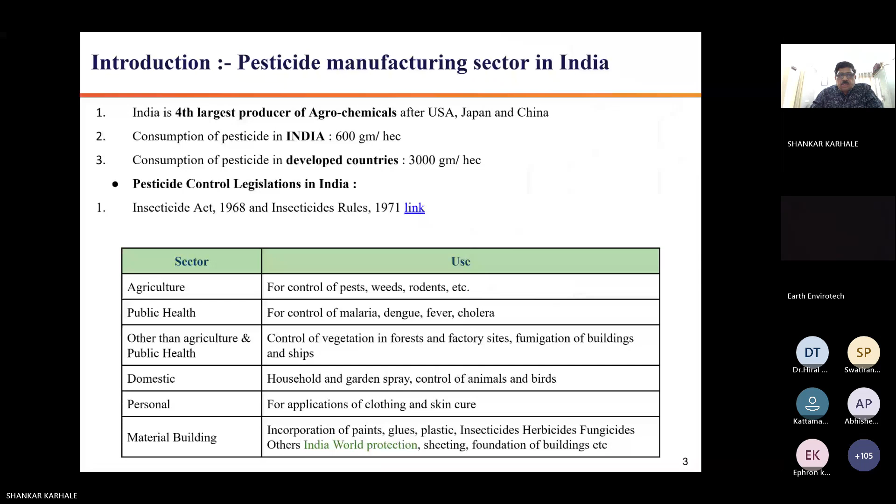So pesticide manufacturing involves chemical reactions like other sectors, like alkylation, bromination, chlorination, acetylation, condensation, cyclization, as in chemical industries like pharma and dyes. Here also, batch, continuous and semi-continuous mode operation; distillation, extraction, crystallization, filtration, evaporation, all unit operations are utilized in the pesticide sector like pharma and other chemical industries.

Reaction 1 is A plus B equals C plus D; reaction 2, D plus E equals F. Reaction 1 is a normal reaction like other sectors have. Only reaction 2 is a slightly toxic reaction here in the pesticide sector. All chemicals utilized in pharma, dyes, rubber and other sectors are also utilized here. Only the last reaction has some toxicity, so you have to take care of the last stage of reactions. Otherwise normal reactions. So here F is the pesticide and the others up to E are raw materials and intermediates.

My voice is clear, na? Anyone? Yes, sir, it is clear and audible.

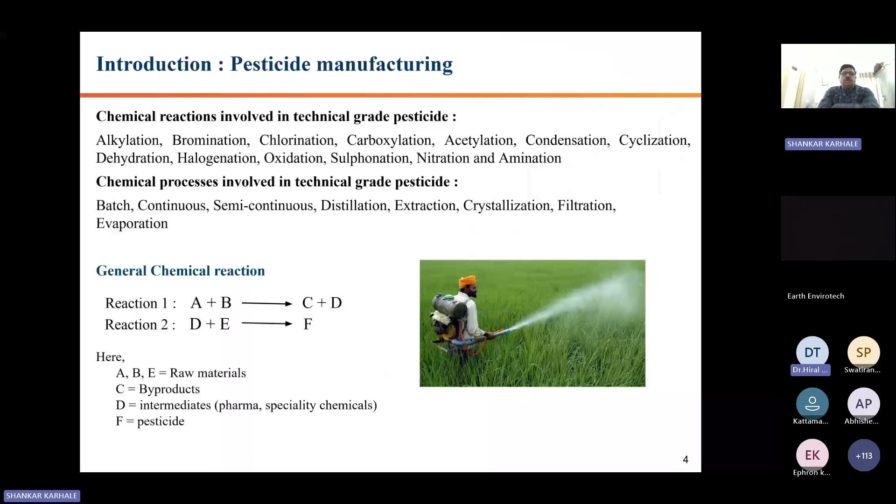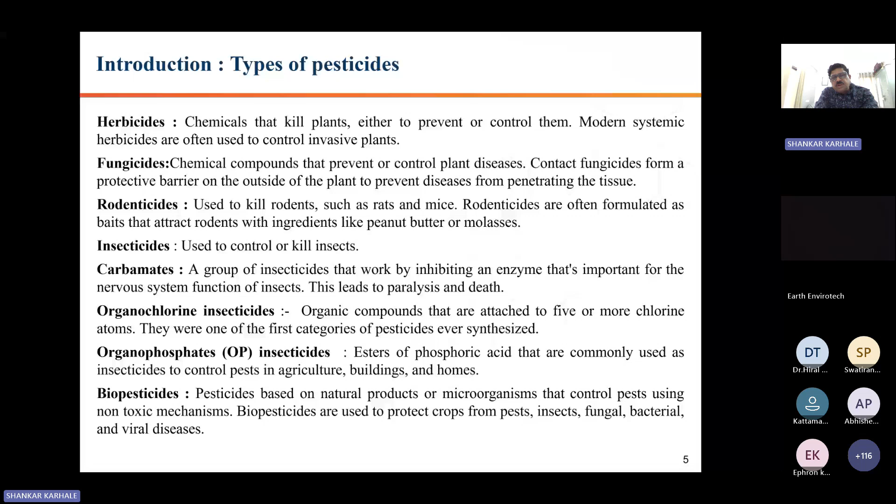Okay. So types of pesticides and utilization are very, very important because you should differentiate. Otherwise there may be hazards if you do not properly distinguish the use and how to utilize the pesticide. Right now, if you see pesticides coming into food and vegetables, the only reason is that utilization of pesticide is not proper, and awareness of pesticides is not proper among farmers and other users.

So it is very, very important to understand what type of pesticide it is and how to utilize it, how much quantum you should utilize. So herbicide is one type of pesticide. A herbicide is a chemical that kills plants, either to prevent or control them.

Modern systemic herbicides are often used to control invasive plants. Whenever you are utilizing herbicide, don't keep it along with fungicide and others, because one is for burning and killing the plant, and the other is for growing the plant. So you have to distinguish between herbicide, insecticide, and pesticide.

Fungicide is a second type of pesticide, also a chemical compound that prevents or controls plant disease. Contact fungicide forms protective barriers on the outside of the plant to prevent diseases from penetrating the tissues.

Third is rodenticide, used to kill rodents such as rats, which we utilize many times in our house and also in storage areas. Then insecticides are used to control and kill insects. This is a different utilization than herbicide and others.

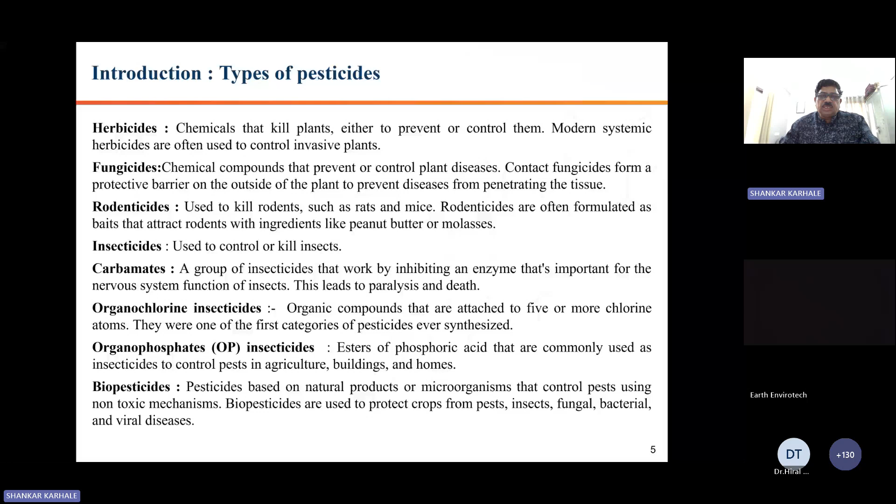Now we will see wastewater and water management in the pesticide sector, same as the chemical sector. Only some parameters are slightly different, meaning discharge parameters. Otherwise this is common for all chemical sectors.

Water consumption in pesticide processes mostly happens in the processes because a lot of cooling and heating is required. That time process utilization is there - cooling towers, boiler, and domestic purposes.

Water source - in Gujarat you have GIDC, if you are from Maharashtra, MIDC, like this there is a corporation many times. If you have a bore well, you have to take CGWA permission. But the major part of chemical industries in GIDC, MIDC, depending on your state, that corporation and industrial estate provides water source also.

But if you are utilizing bore well water, if you are not supplied by your corporation, and you want a bore well, then you need CGWA permission - Central Groundwater Authority.

Wastewater generated from process, industrial cooling, is wastewater that cannot be used back into the processes without treatment. So this is the definition of wastewater - without treatment you cannot utilize it for recycling again or for discharge. That's called wastewater.

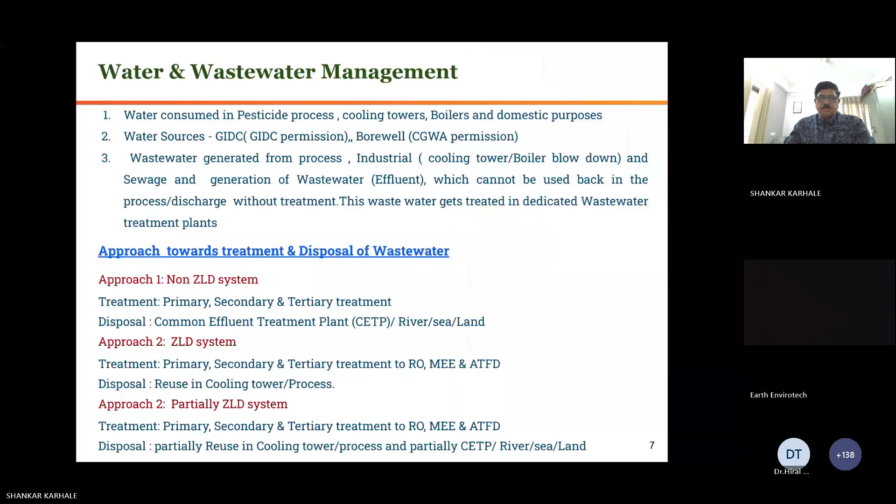Why is wastewater treatment important in the pesticide as well as chemical industry? To avoid environmental pollution and health impact, to meet CETP discharge norms, deep sea discharge norms, and water quality for recycling and utility.

Whenever you want to utilize the treated water, treatment is very important to recycle. Otherwise your equipment, reactors or cooling towers will be damaged if you use this water without treatment. So this is very important.

Whenever you want ZLD implementation, discharge to deep sea, discharge to river, discharge to surface, it's very important in chemical industry as well as pesticide industry - that is the segregation part. Then only you can achieve the desired norms. Otherwise, it's a very difficult area to treat chemical industry and pesticide industry effluent. So we'll see how to segregate this generated effluent in the pesticide sector as well as chemical industry.

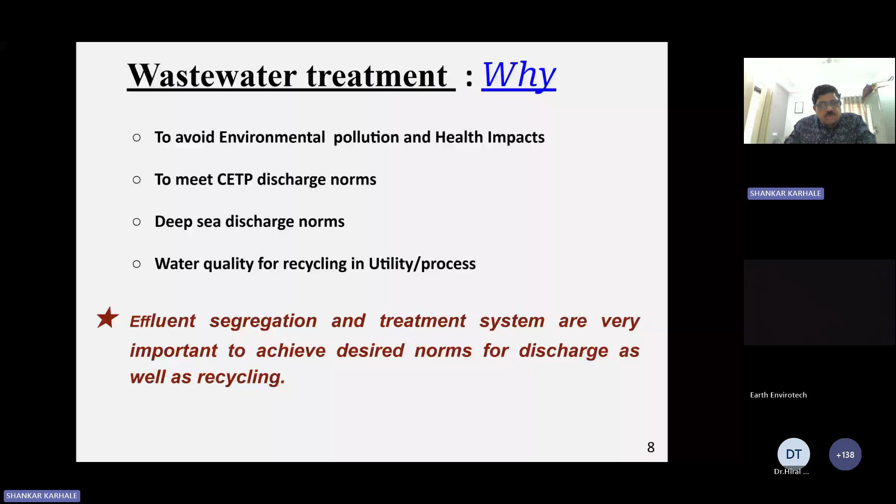So majorly there are four types of wastewater. One is from processes - chemical processes require some washing, generation of water in reaction, distillation, and all these things, to remove water from the particular final product. So there is a lot of generation of process effluent. Then utilities like cooling tower, boiler blowdowns - there is generation from utilities.

Third is washing and cleaning activity of equipment. Then fourth is sewage water. So this is how we segregate the major parts in industry.

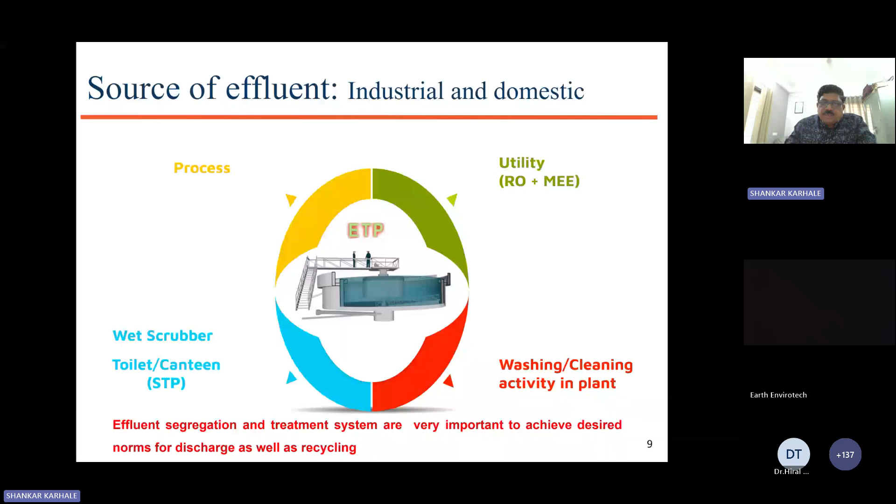And on a micro level, again we'll see how to segregate the effluent in chemical industry. This is by experience - I have divided it into some segregation parts. This may not be written in your book or syllabus anywhere, but this is by experience. We have decided this, and we got results on that - if you segregate like this, then we are getting good results for the pesticide sector as well as chemical industries.

So if you have low COD and low TDS effluent - if COD is 5,000 and TDS is 10,000 - the criteria is like this: if BOD is more than 30% of COD, then you can take it into biological treatment. Biological treatment can be activated sludge process, MBR, MBBR, depending on the technology accepted. So this is primary, secondary, and tertiary treatment. Secondary treatment can be activated sludge process, MBR, MBBR, like this.

If BOD is less than 30% of COD - because in biological treatment, the COD-BOD ratio is very, very important. Generally in chemical industry, 30% BOD is there. But if you go to the food industry or alcohol manufacturing industries, then you'll get about 50% BOD ratio. But generally, as a thumb rule, in chemical industry and pesticide industry you get about 30% only. If less than that, you need pre-treatment like an oxidation system followed by ETP.

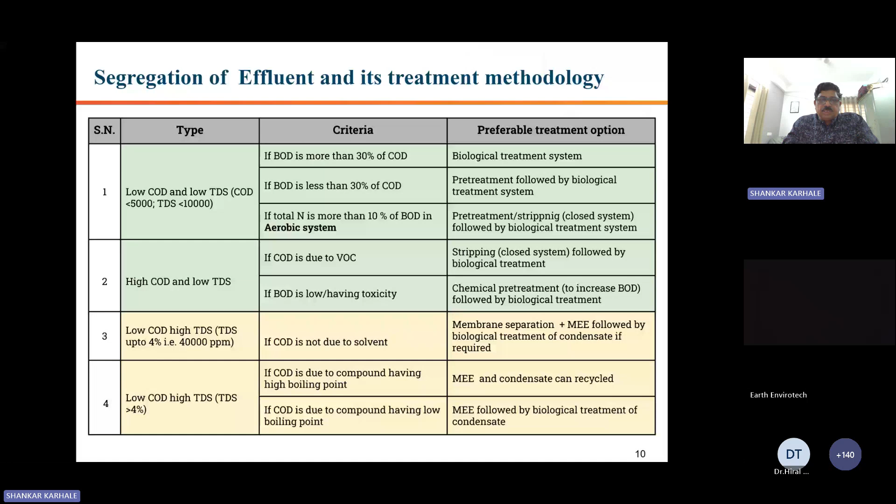As of today, they are utilizing coal as a major fuel. That can be replaced by your residues and effluent having a CV value above 2500 kilocalorie per kg. This is very good and motivated by Government of India and state pollution control boards also, and they are enforcing industries to send their effluent to co-processing at cement industries because there is a lot of carbon footprint reduction as well as utilization as a fuel.

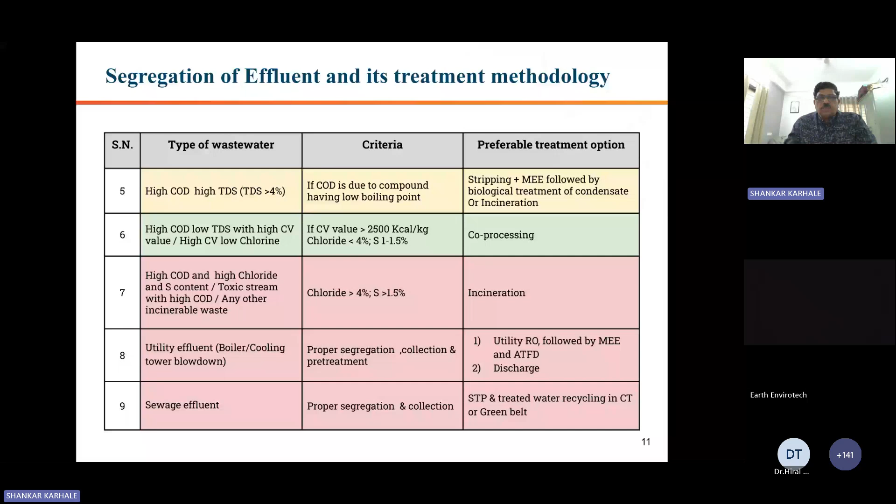So this is the segregation part. This is very, very important for chemical industry or pesticide industry, this segregation. Only then will we achieve the desired result in your industry.

So we'll see the effluent treatment plan in the pesticide sector as well as other chemical sectors is the same, not much different. Only in the pesticide sector, in primary treatment, you can put pH up to 10.5 so that any pesticide compound coming from your plant processes will be destroyed through lime. So you need pH at primary level 10.5. In other chemical industries, pH can be only 8.5 to 9.

So here also treatment mechanisms like physical, chemical, and biological treatment are required - primary, secondary, and tertiary you can say. Preliminary treatment needs both physical unit operations and chemical unit operations. Sometimes advanced oxidation systems are required before ETP.

Primary treatment uses both physical methods for SS removal, and chemical coagulation and flocculation methods for treatment. Biological treatment uses activated sludge processes like aerobic processes, MBR, MBBR, and SBR, sequencing batch reactor. If your COD BOD ratio is very high, anaerobic processes like in food industry and alcohol industry utilize anaerobic processes, but chemical industry and pesticide industries mostly utilize aerobic processes because the COD BOD ratio is below 30%.

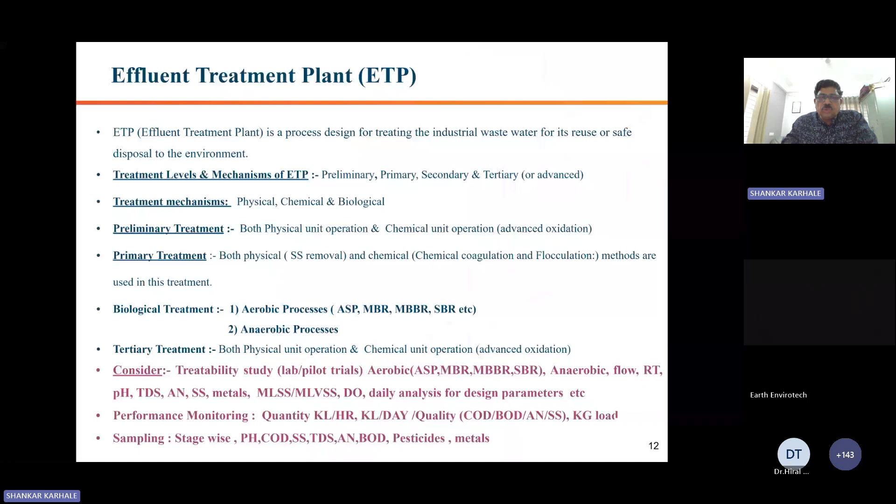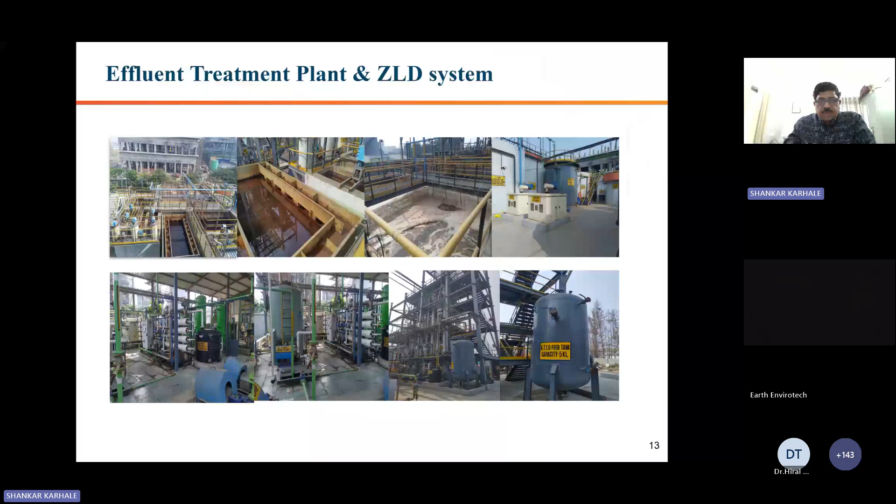So like this sewage treatment plant - sewage plant is nothing else, it is also like activated sludge process, MBBR, MBR type, activated compact type sewage treatment plants now available in market. So generated treated water should be utilized in gardening, green belt development, or cooling towers.

So this is very important - don't operate without STP. This is a very good recycling system, and right now we are getting results like 10 ppm BOD in outlet, COD maybe 30, or SS maybe 10 in that particular STP plant. So this is easily recyclable water, available water for you in chemical industry as well as pesticide industry.

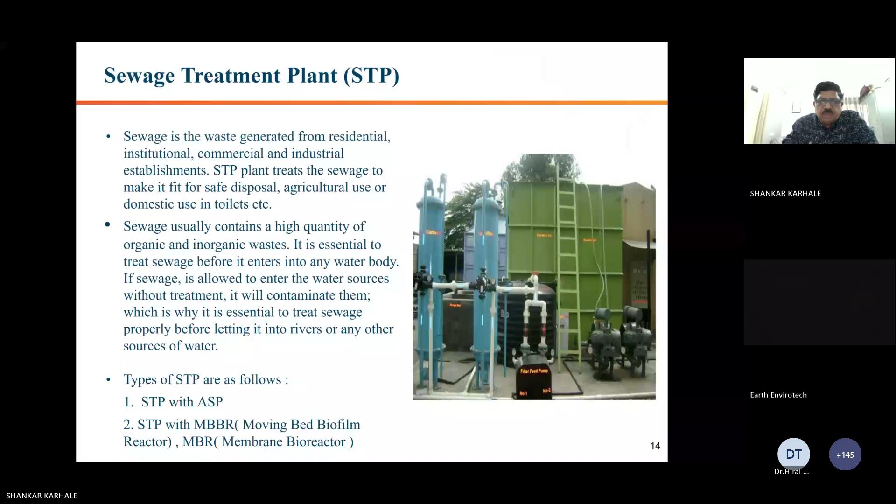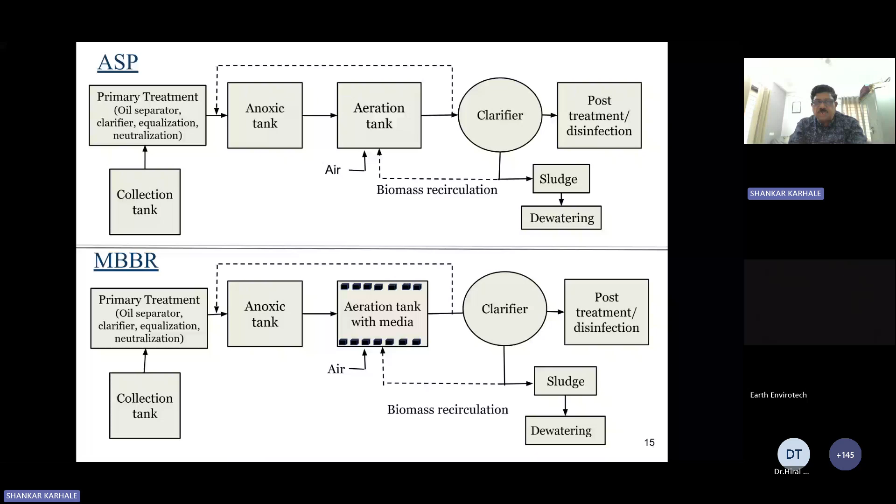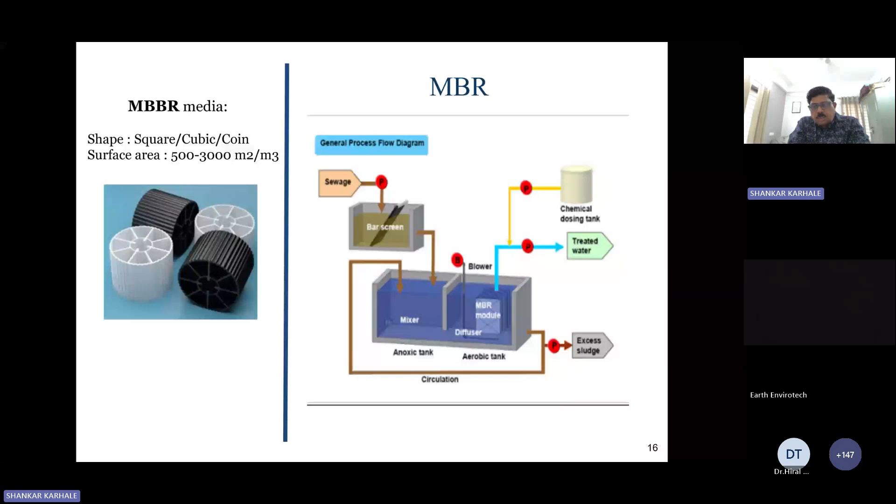One more, MBR, membrane bioreactor. This is also the same, only you don't require a clarifier here. The MBR works as a clarifier, and you get very clear water, suspended solids maybe 10 to 20. The other two activated sludge processes have SS values of maybe 80 to 100. Here 10 to 20 only, and you can increase your biomass from 3000 milligrams to 10,000. This is also one compact activated sludge process.

What is ZLD? ZLD means the effluent you generate, you are recycling back into the process, and in that cycle there is a generation of solid waste like salts. The salt should be sent to landfilling. So you need an effluent treatment plant as well as RO system and multiple effect evaporator to maintain ZLD. Your sewage water also needs to be treated and recycled back into the process. So nothing gets discharged, zero liquid discharge. We have already seen it.

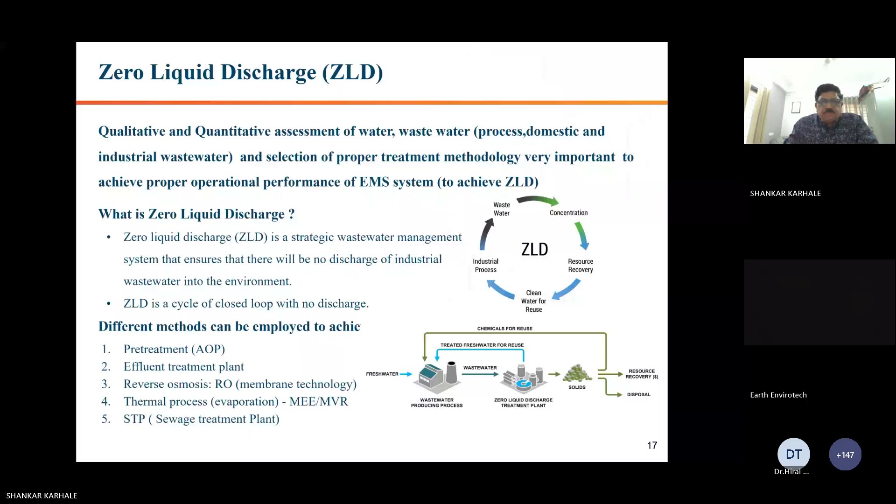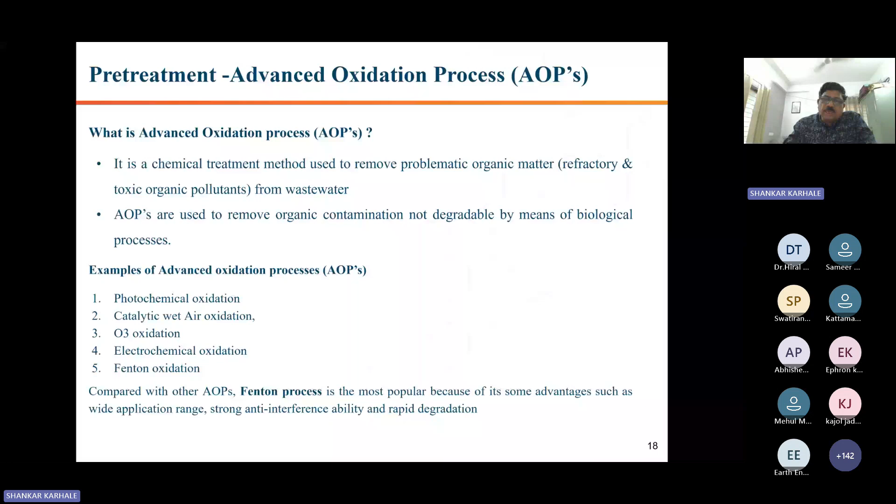Now, pre-treatment is an important part, we have seen it in segregation. Whenever there is high COD and you need to treat it in the ETP plant, then advanced oxidation processes are required, like photochemical oxidation, catalytic wet oxidation, ozonation O3, electrochemical oxidation, and Fenton oxidation. Fenton is a scientist. He oxidized the highest chemical effluent with H2O2 and ferrous sulfate at pH about 3.5 and generated OH radicals. The OH radical does the oxidation and reduction in your chemical. How the OH radicals are generated is also shown here.

But this is a costly chemical treatment methodology. So right now a lot of other oxidation methodologies are in the market, like chlorination, ozonation. Whenever you want pre-treatment by Fenton, you first take lab trials, pilot trials, and only then go for commercialization.

Parameters needed at inlet and outlet: you have to see pH, COD, BOD, and ammonical nitrogen. You have to see the performance on both sides, quality as well as quantity. Quality is required because it is followed by the effluent treatment plant. So your Fenton treatment is very important to run the activated sludge process or ETP plant. Quantity because you have to see the batch. Fenton treatment is mostly a batch process, so batch time, batch residence time, and results are very important.

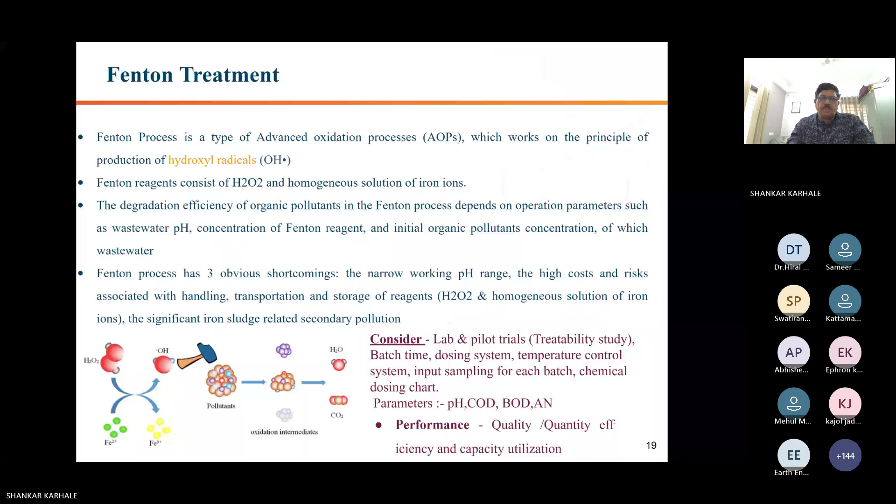Reverse osmosis is a process where a membrane is used, and the membrane removes impurities like suspended solids, TDS and other impurities from the water, and almost pure water we get in the permeate, and reject is generated. Sometimes you have to concentrate it again by HPRO or take it directly into the multiple effect evaporator or evaporation system. Whenever you want to install RO, right now a lot of pilot plants are available in the market. Take trials there, because it is very sensitive membrane equipment. Many times it gets damaged by solvents as well as free chlorine. So you need to check your effluent on that membrane. Many times you have to take a test for your effluent so that membrane life will be increased.

Here also parameters are very important, like silica, hardness, turbidity, free chlorine, ammonical nitrogen, solvents, organics, TSS, TDS. You have to monitor them daily at inlet and outlet so that you get the qualitative and quantitative performance of the RO system.

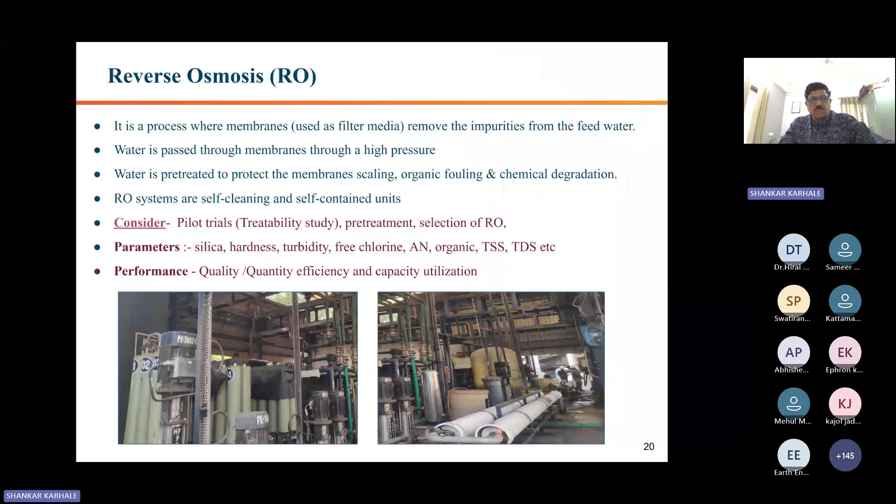One more equipment, the multiple effect evaporator. Once you generate reject in RO, or directly process high TDS effluent like 4% to 10%, you utilize the multiple effect evaporator to separate out your salt, and the generated condensate you can recycle back into the process, cool it down, or depending on its characteristics, treat it again and utilize it in the process or discharge.

Here also many consultants are available to take your trials, because many parameters like silica and hardness are very important. If you have not properly pre-treated, then your multiple effect evaporator operation is very difficult. Choking, scaling, and all these issues will come. So proper parameter monitoring before installation and pre-treatment is very important for RO as well as multiple effect evaporator. Only then your equipment life and running hours will increase with less maintenance, if you have properly pre-treated.

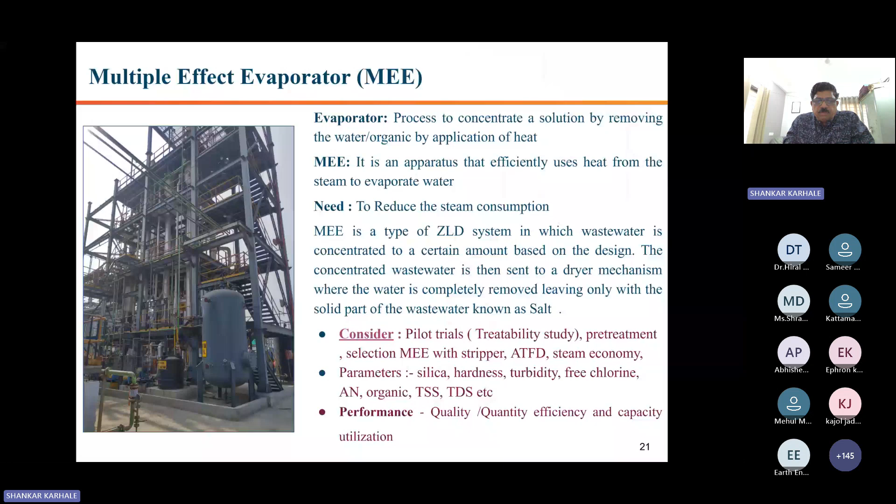So ATFD is one more equipment. After this, concentrate your effluent up to 30%, then your feed will be the ATFD, so that you can again concentrate your salts to moisture below 10%, 5% like this. So this is nothing else, one of the single stage evaporators. Here about 1 kg steam is required for 1 kg effluent evaporation. In a multiple effect evaporator, 0.3 to 0.4 kg steam is required for 1 kg evaporation of effluent.

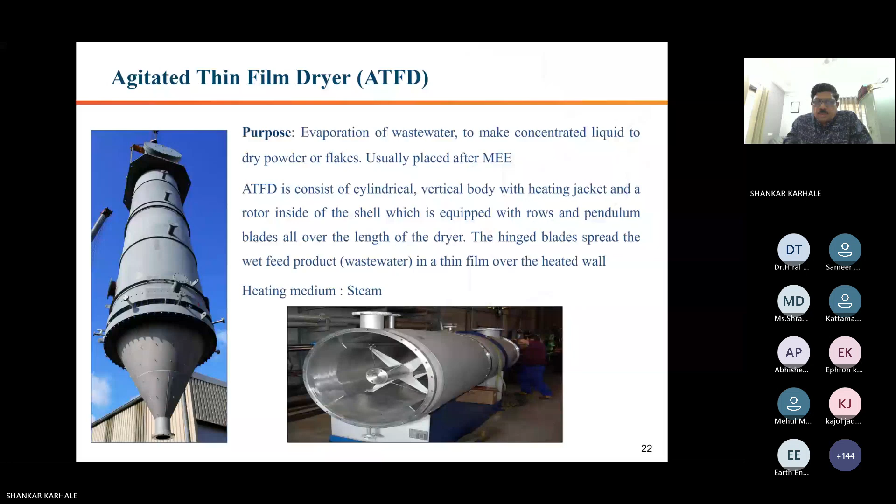If you see the CPCB effluent standard for the pesticide sector, almost all parameters are the same as other chemical industry, but only if you see this bioassay test and other pesticides required, they have given concentration of pesticides like DDT 0.01 milligram per liter. Bioassay is 90% survival of fish after 96 hours in 100% effluent. One more requirement in the pesticide sector is a toxicity factor 2, toxicity factor 4, that is 48-hour half dilution required fish survival.

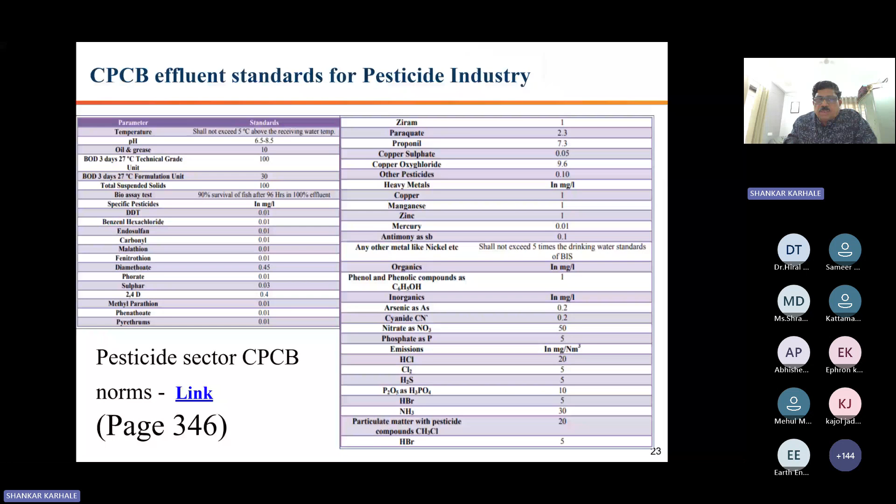So like this, there is a difference. Otherwise, all other parameters like metals and all these things are the same as other industry. Only pesticide and bioassay is slightly different than the other sectors. And it depends on where we are discharging. Again, slightly there is a difference in parameters like COD, BOD. If you are discharging to river, then 250 COD, BOD maybe 30. If you are discharging on surface, then 100 COD required, BOD required 30. If you are discharging to marine, maybe 500 COD and 100 BOD. So depending on where we are discharging, the limit will slightly change.

So generally in the chemical industry as well as the pesticide sector, there are two types of gas emissions, three types you can say. One is flue gas emission, wherever we are utilizing fuel like coal, biomass, gas, diesel and all these things. It's called flue gas emissions: boiler, DG set, and all these things. So there is generation of emissions like PM, SO2, and NOx. Depending on the fuel, air pollution control measures are provided.

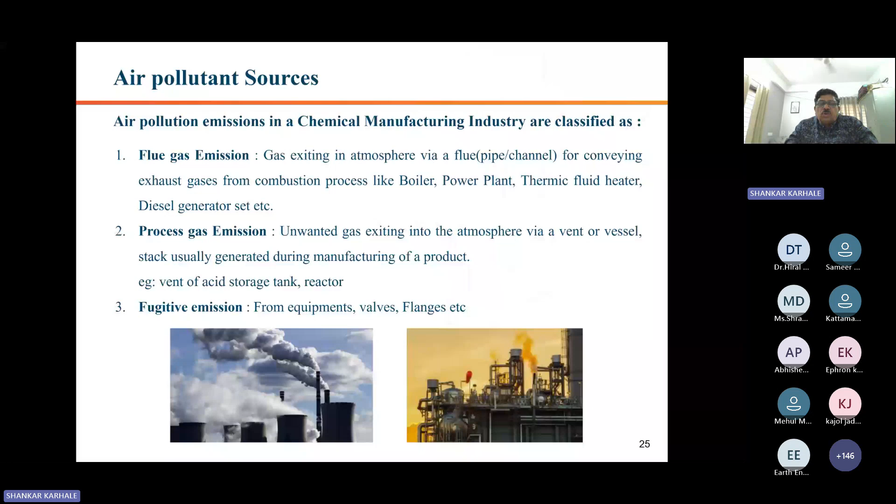So if you see the distinguishing of the three parts: fugitive emission, flue gas emission. Process emissions are like PM, HCl, NOx, chlorine, SO2, acid mist, HBr, ammonia, HF, depending on the process and chemical reaction. But flue gas emission has only three parameters: PM, SO2, NOx. For PM control, generally ESP, cyclone, and bag filters are utilized. SOx: FGD, dry sorbent injection. Dry sorbent means nothing else but lime addition along with coal. NOx: low NOx burner systems are available. And process scrubbers, we'll see in one more slide we have provided here.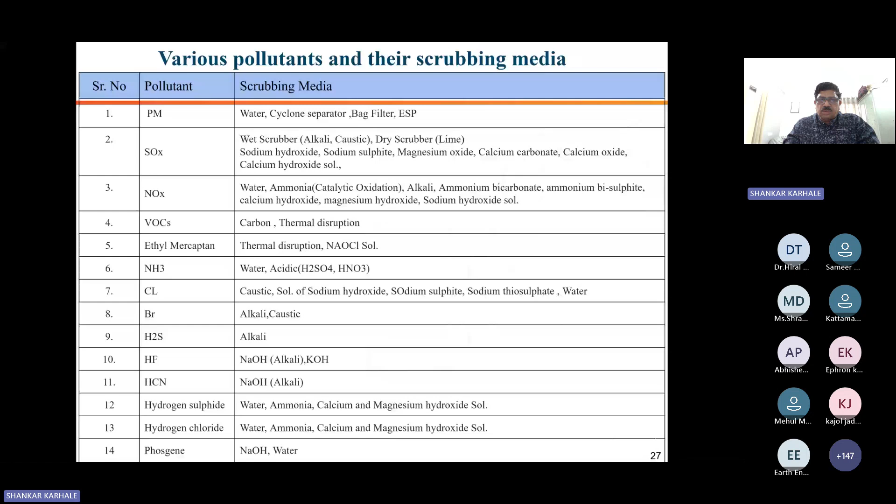So this is air pollution control equipment for particulate matter, like cyclone separator, multi-cyclone, bag filter, and electrostatic precipitator. ESP requires a lot of capital investment as well as operation cost. But results are very, very good. You are getting below 10, 20 ppm particulate matter.

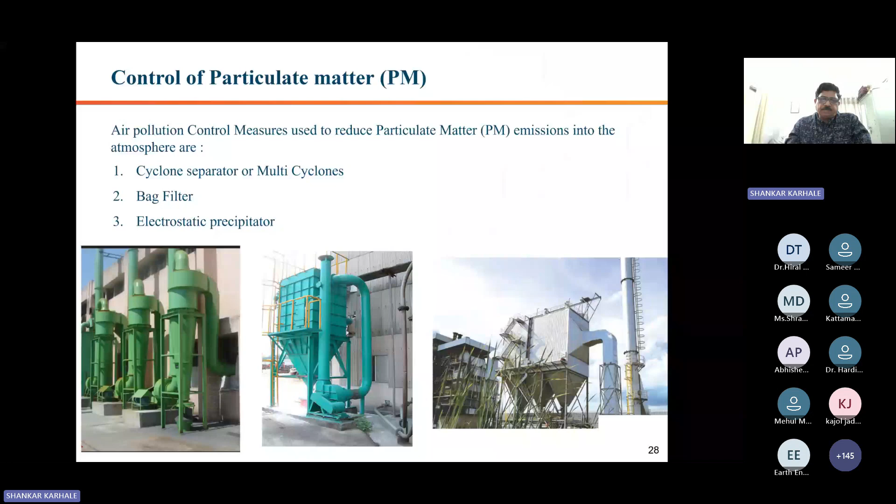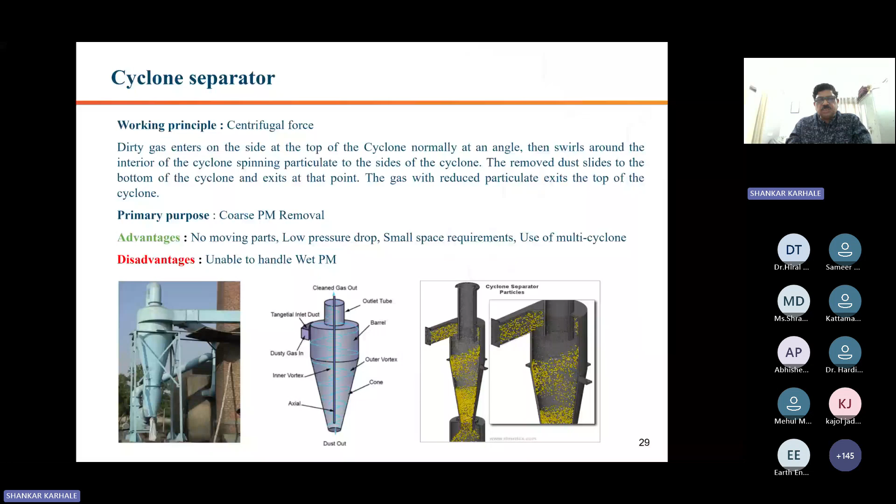Cyclone separator is also equipment to control PM, but not as efficient as ESP. But with a multi-cyclone separator you can achieve below 150 particulate matter. With a bag filter, we are getting 42, 60, 70, 80 PM. So the bag filter is also one of the efficient equipment, like ESP.

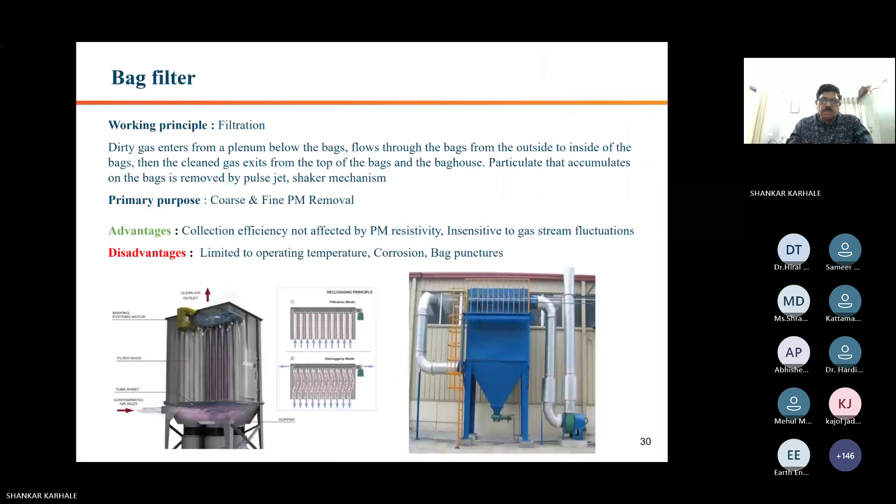This is very, very efficient equipment, the electrostatic precipitator, ESP. Only the capital investment is high and operation cost is high. So most coal-fired boilers utilize ESPs to achieve the desired norms.

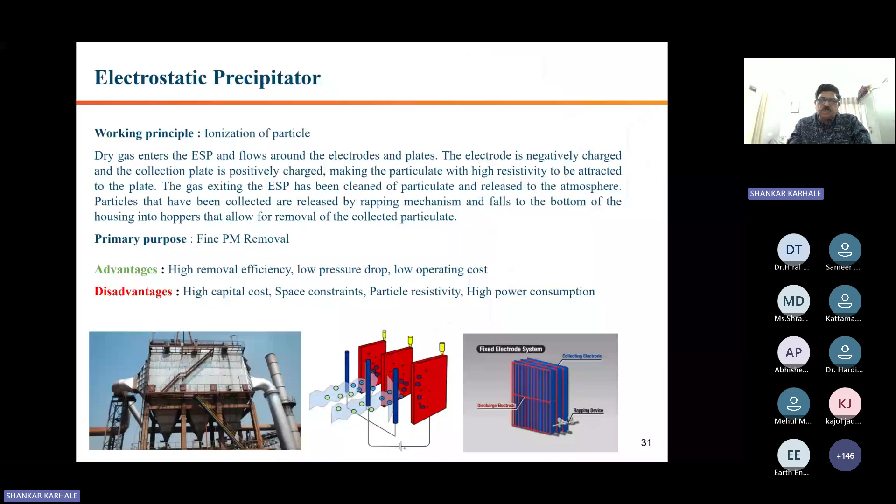Control measures for process emissions. So it depends on dry or wet scrubber. Wet scrubber means packed column towers, plate tray column, venturi, and all these things. So this depends on the type of the process emission. We have already seen the media for circulation.

So here is the media, and the distribution of that media in the packed column tower is very, very important. So the distribution system is very important. You have to optimize the scrubber media for concentration, normality, pH, gravity. Depending on that, you can select the media as well as optimize that media on a daily basis as per your operations.

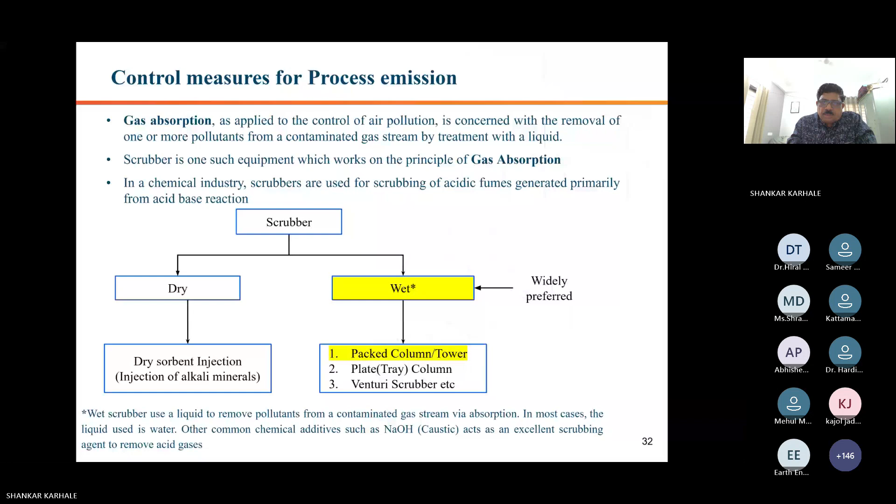Packed bed scrubbers look like this. There is a distribution system, and many times that distribution system has choking, leakages, bypassing, then you will not get the proper result in the packed tower scrubber. So annual maintenance, 6 monthly maintenance, cleaning is very, very important.

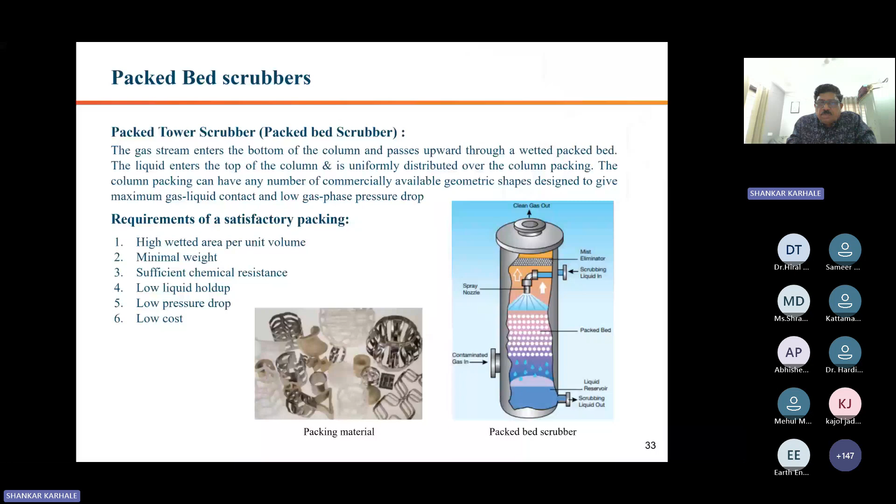Many times the packing material, like Intalox saddles, will be choking there, so it needs proper cleaning on a quarterly basis, 6 monthly basis. Then only you will get proper results. And your monitoring part on a monthly basis, sometimes fortnightly basis.

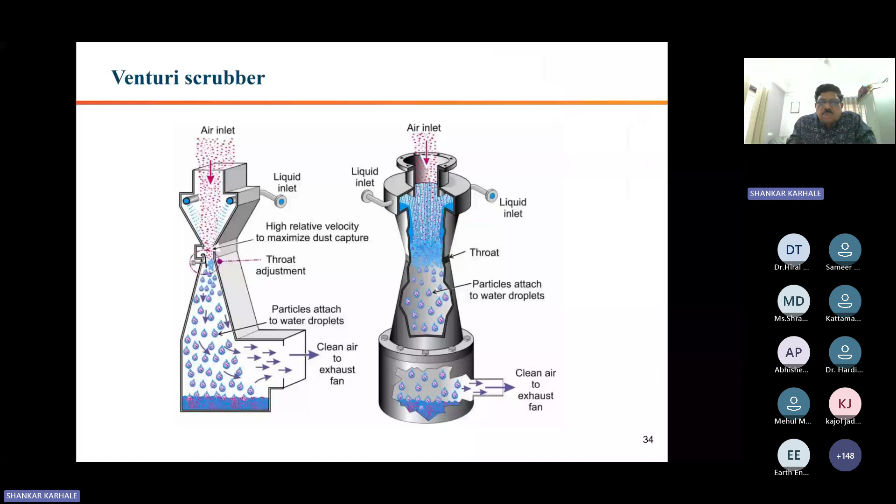One more control technology for air emissions. Here is a summarized part. So recovery techniques for VOC and inorganic gases like selective membrane separation, condensation, adsorption, wet scrubbing, and steam stripping are required. Then abatement techniques for VOC and inorganic gases are biofiltration, bioscrubbers. All these methodologies are there.

Recovery and abatement techniques like cyclone separator, ESP, wet dust scrubber, two-stage dust. So you can get recovery of your product also. Dry sorbent injection, semi-dry. These are all methodologies to utilize your air emission control techniques. Dry scrubber, lime and alkali scrubber for SOx reduction.

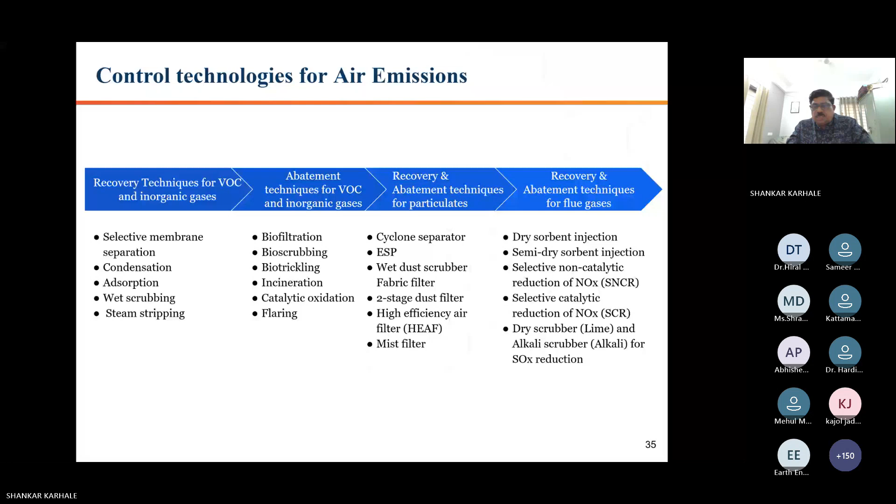If you see the air pollution from the pesticide industries, mostly PM, SO2, NOx, HCl, HBr, H2S, SO3, methyl chloride, ammonia, P2O5. All these are the compounds generated from the processes. But for the pesticide sector versus other sectors, if you see the norms, HCl is 20, other sectors are also 20. But chlorine from the pesticide sector requires 5 milligram, and other sectors 9.

H2S, the pesticide sector requires 5, other sectors 45. P2O5 10, other sectors may not have P2O5 generation or limit. Ammonia, the pesticide sector requires 30, and other chemical sectors 175. PM with pesticide compounds is 20, and other sectors 150 to 800. Other sectors means like the cement industry, where 800 PM is allowed.

Methyl chloride is 20, HBr is 5. Other sectors may not be generating them. That's why there is no limit.

Here also, performance monitoring depends on quality and quantity. You have to see the efficiency of your scrubbers and air pollution control systems like ESP, bag filter, scrubber, venturi scrubber, all these things, qualitatively and quantitatively. So efficiency monitoring is very, very important from both angles.

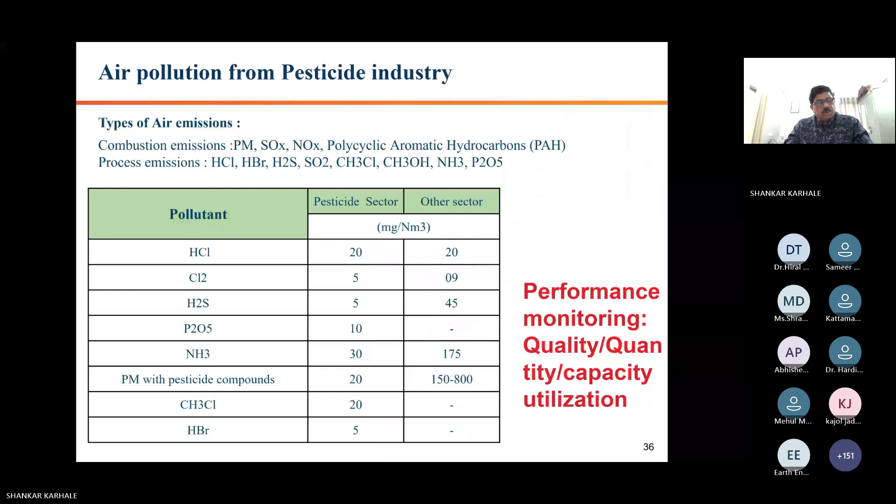So one more: OCEMS, online continuous emission monitoring systems, right now is applicable to all chemical industries as well as the pesticide industry. So you have to monitor. Previously, we were monitoring two times monthly, or one time monthly. But right now, your boilers and your process stacks are continuously monitored and connected to the pollution control board websites like CPCB or SPCB, depending on the state pollution control board where your industry is located.

So this is also one requirement, and they are monitoring our performance, the industry's performance. If there is any deviation, they are giving alerts and all these things. So corrective action is done on an immediate basis, and people are also alert: my data is going to the CPCB side, so I have to perform properly. This is a good initiative done by the Indian government, like CPCB and SPCB.

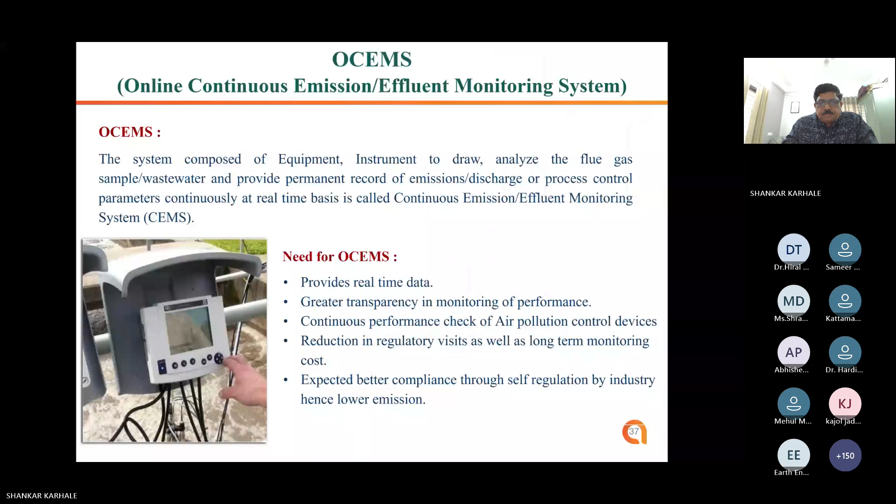One more important area for the chemical industry is hazardous waste management, because in any chemical process there is generation of effluent as well as hazardous waste. Hazardous waste is also dangerous, potentially harmful to our health and environment. So you have to take care. Hazardous waste can be liquid, solid, gases, or sludges. It may cause an increase in mortality or severe illness. If it is dumped anywhere without treatment, then you'll get an impact on the environment as well as health.

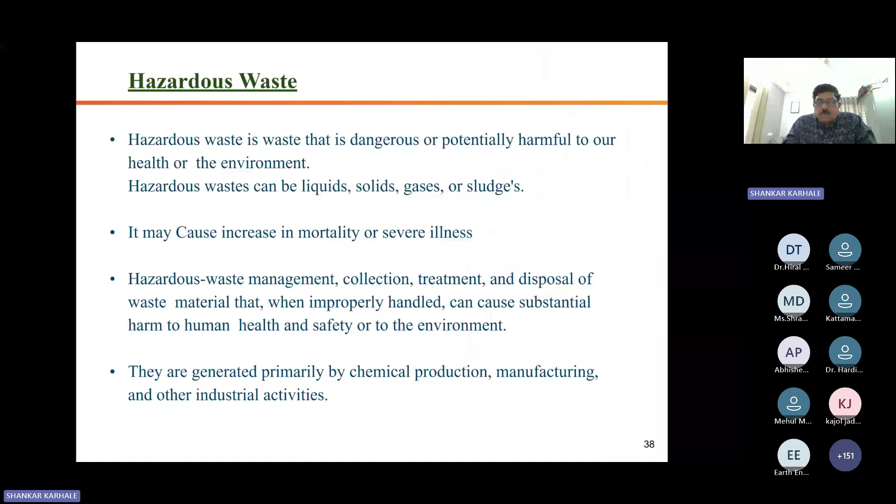So it is very, very important how you are collecting hazardous waste, how you treat and dispose of it, where you are disposing, and what treatment you are giving to that particular generated hazardous waste. So very, very important. But waste always has a cost or carbon footprint. If you are generating waste and not recycling it or converting it into valuable products, that is costly, and there is generation of CO2 during the treatment. So there is a hierarchy.

Avoid and reduce the waste. So you may be having R&D people, process improvement people. So give them the job of how to avoid the generation of waste by improving the existing operation methodology: raw material changes, distillation column from batch to continuous, changes like these, and how to avoid it at the process side.

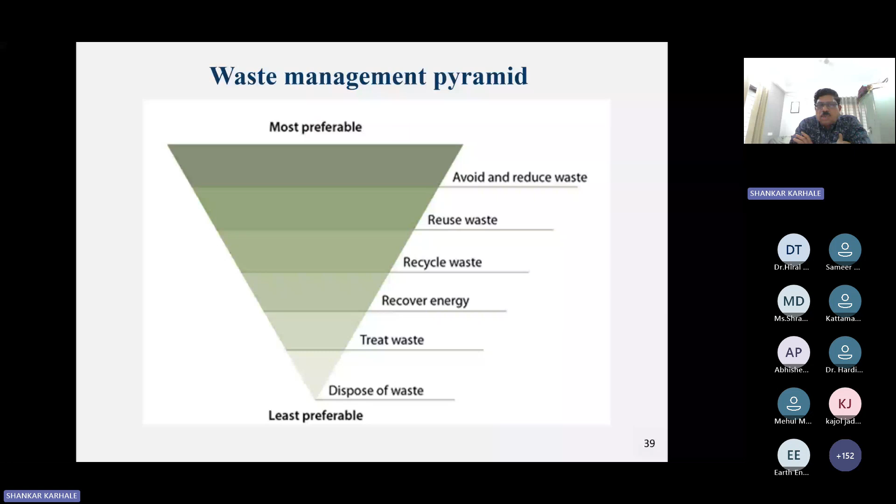If I generate it, how to reuse that waste, how to recycle that waste, how to improve recovery from it, and if you recover it into energy, you have to send it for co-processing in the cement industry. And if you cannot avoid it at the upper part, then treatment is required and disposal is also required. Disposal is last. So this is a pyramid for waste management. Here also the approach should be there: an environmental management approach, particularly for waste and effluent.

If you see the contribution to carbon footprint, if your effluent is going to incineration, then higher cost and higher carbon footprint. Then the second part is chemical treatment like Fenton, MEE, reverse osmosis, and ETP and STP. So if you see the eco-friendly system, ETP and STP is a good system. This is gifted by God, because these microorganisms are working to reduce our chemical contamination. So always see whether your effluent can be treated in the ETP.

Give some methodology, pre-treatment, for your incinerable waste, chemical treatment, and reverse osmosis streams to treat them in the ETP and recycle. That should be the approach, so that you will reduce your cost as well as carbon footprint. Cost-wise, ETP cost is generally about 200 to 300 rupees per KL. Reverse osmosis is 400 to 600 rupees per KL. MEE is 1300 to 1800 rupees per KL. Chemical treatment may require 5000 to 7000 rupees per KL, and incineration 40,000 to 60,000 rupees per KL. So depending on cost, there is a multiplication factor on carbon footprint also.

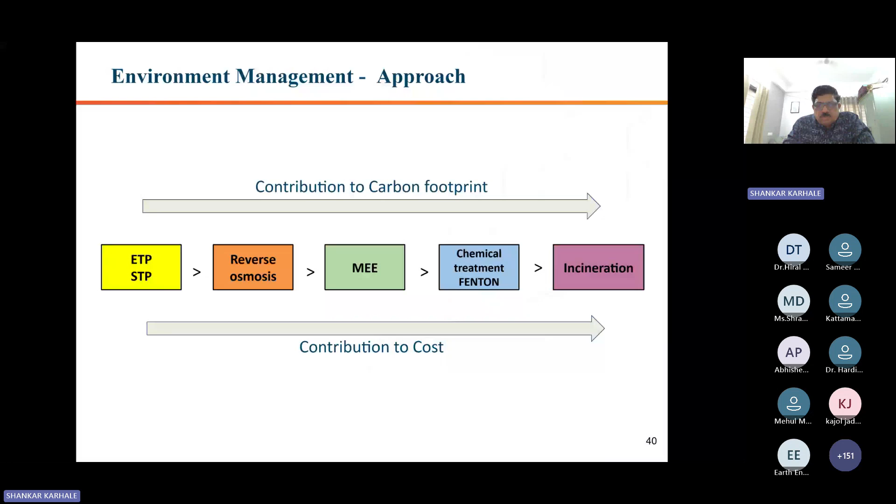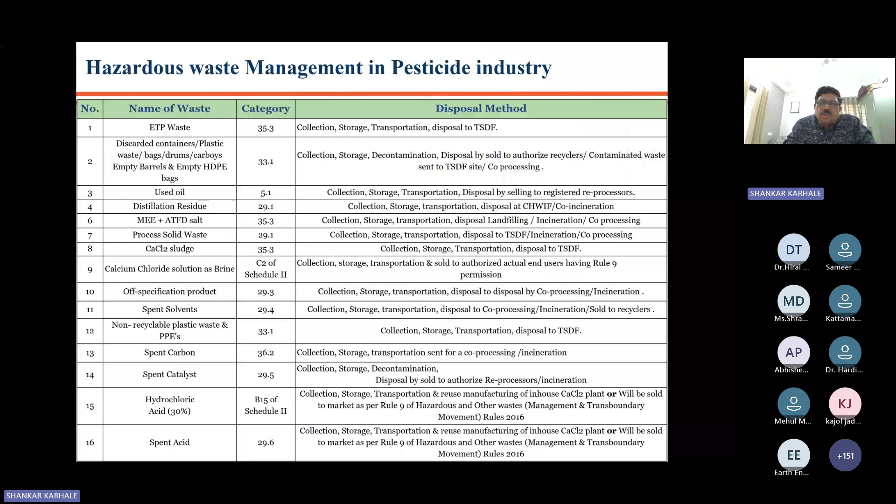So already, if you see this, some stream segregation we have already seen above. Toxic aqueous effluent, then incineration required. High calorific value, low chloride: co-processing. Then ETP sludge high chloride, then TSDF required. ETP sludge low chloride, then you can give to cement industries. This is also one good example.

If chloride is below 3% and your ETP sludge is having calcium sulfate, then the cement industry utilizes it as a filler. After clinker, there is a requirement of filling by others like fly ash, gypsum, and all these things. So ETP sludge can be utilized there. Used oil sold to approved recyclers. They have a good recycling and recovery system, and they are again selling into the market. So generated used oil, spent solvent, lead batteries sold to recyclers.

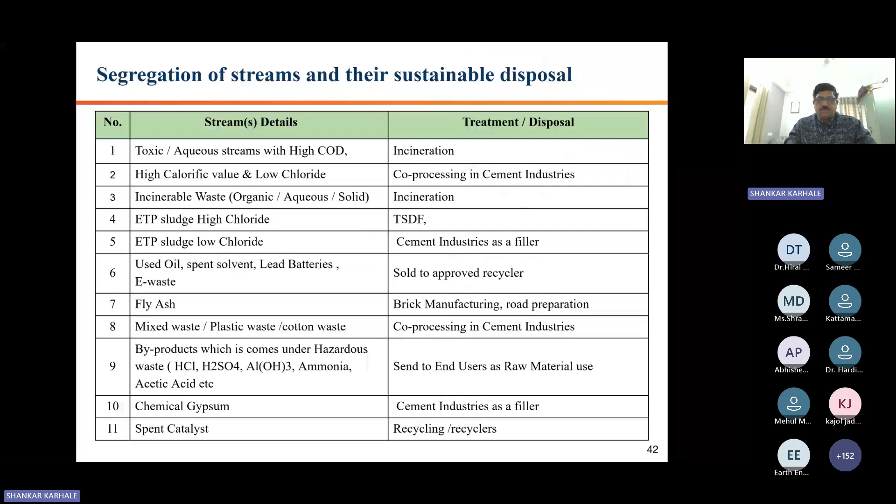Fly ash you can give to brick manufacture, road preparation, and low-lying areas you can utilize. Mixed waste plastic to cement industry for co-processing, because mixed waste has some calorific value; they can utilize it as a fuel. Byproduct HCl, sulfuric acid, ammonia, all these things generated in most of the pesticide as well as chemical industries are sent to end users. Those are utilized as raw material. So that is also good. Chemical gypsum sent to cement industry for filler. Spent catalyst you can send to recyclers. So this is the chemical industries operation part, pesticide industry operation part.

Some common legal requirements are also very important in the chemical industries as well as the pesticide industry, because there are a lot of global environmental issues. So there are international agreements, because someone is doing something and someone else is affected in the environmental area. If America is consuming more pesticide, more fuel, then that not only affects America, but can affect India as well as all other countries. So international agreements are very important, and all countries should work on that. Environment is a common area and needs control by everybody.

We see that. So Vienna Convention 1980, there was an ozone layer protection agreement, because in 1978, 1980 we learned about ozone layer depletion in Antarctica. But in 1989, there is the Montreal Protocol. So research on what type of compounds, there are six ODS compounds, and how to take actions, how to protect, how to ban all these things. Montreal Protocol 1989, about 189 countries have signed and action also started. The last date is 2030 to ban all six ODS compounds.

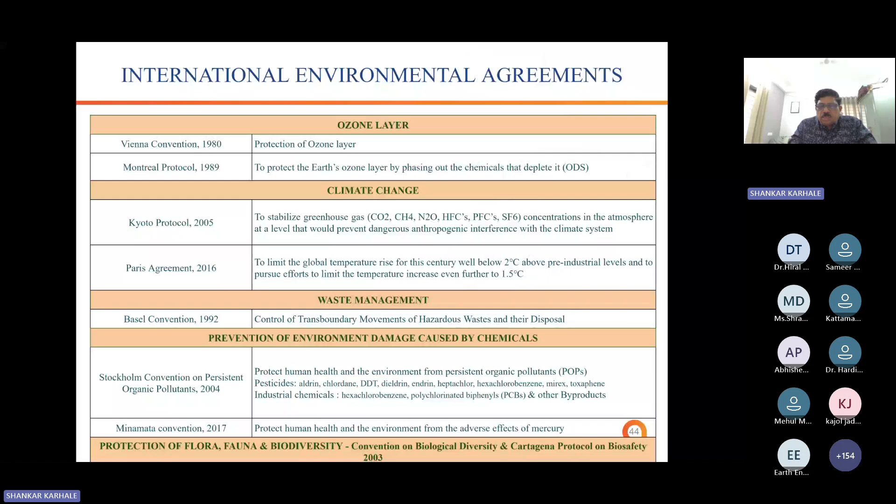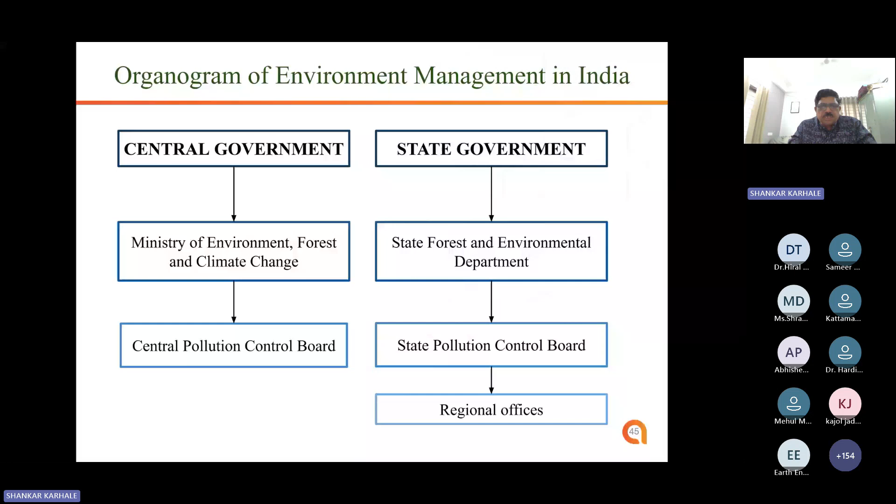So at India level, we have an organogram like this. Central government has the Cabinet Ministry of Environment and Forest, and under that the Central Pollution Control Board. At state level also, state government has the state forest and environment department, and under that the state pollution control board and regional offices are there. The Central Pollution Control Board also has regional officers, and different ministries also have regional officers all over India.

But there was a lot of air pollution issues also found during the operation of chemical industries, particularly. So one more act was published in 1981, the Air Prevention and Control of Pollution Act 1981, for checking pollution through the pollution control board.

But there is one incident in Bhopal in 1984. So before 1984, there were only two acts, the water act and air pollution act, for sources only. Sources means your stacks, boiler stack, flue gas stack, and all these things. There was no condition for ambient air, fugitive emissions, and all these things. This incident happened in the storage tanks. So there were a lot of questions to the authority and government on how to punish that particular industry, which act, which rule is applicable to punish them. But there was a question mark.

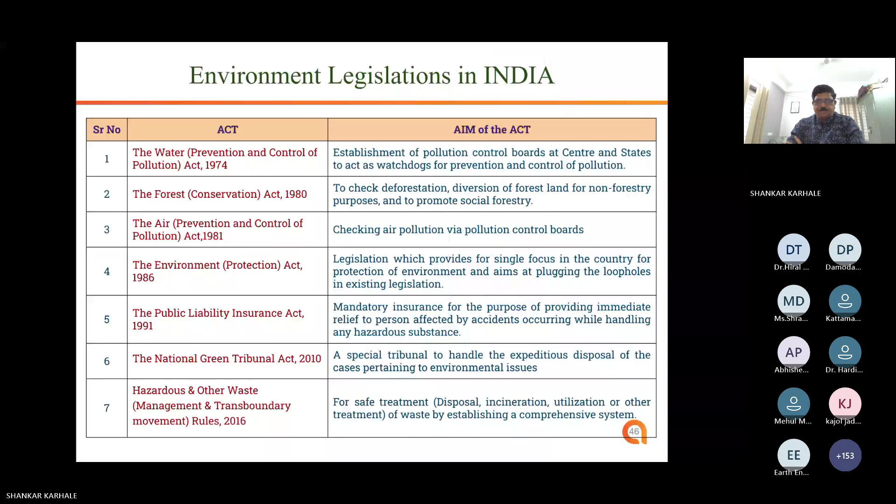Statutory requirement specific to pesticides: almost all rules I have already told you, like biomedical waste and other norms, are also applicable to other industries. Only the particular pesticide sector norms are different, and the pesticide sector requires CIB registration for particular industries for pesticide manufacturing. That is the only difference; otherwise all common legal requirements apply to other chemical industries as well as here. And you should not manufacture banned pesticides like DDT. That is also one requirement for the pesticide sector compared to other sectors.

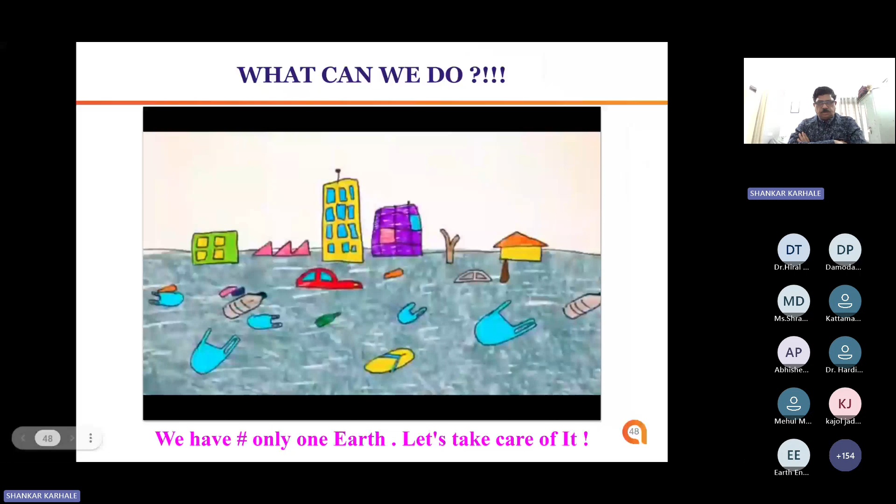What you choose makes a big difference. The right choice - let's choose Mother Earth every day.